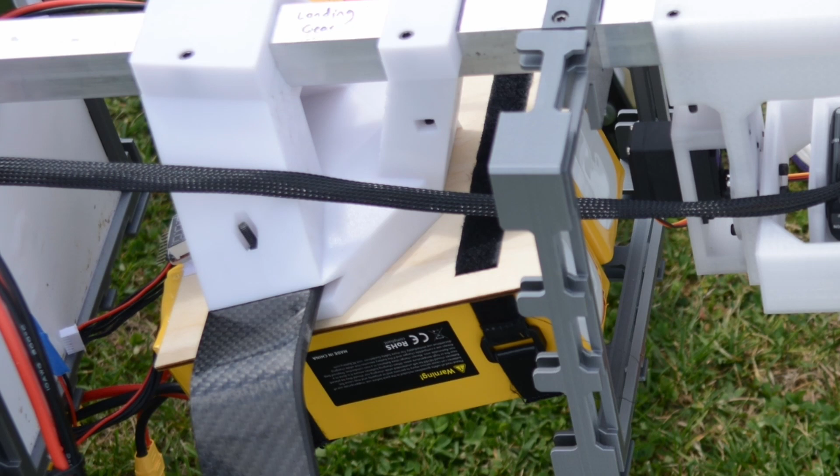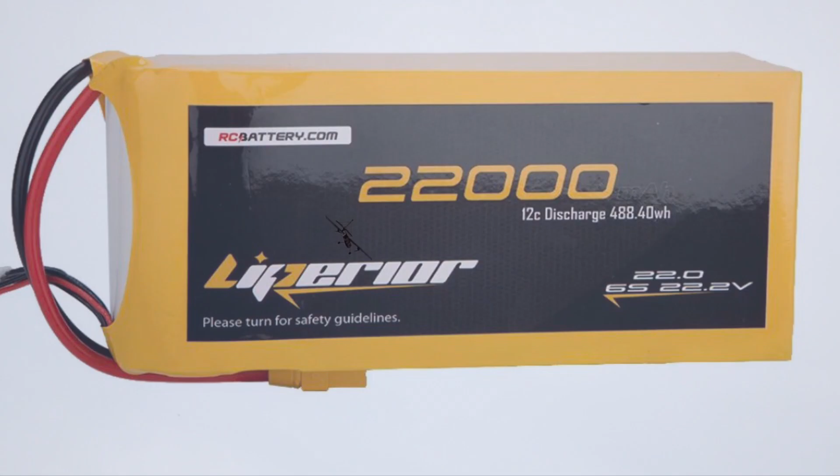Starting with the battery section, the original design contained two 16-amp-hour 6S LiPo batteries to power the motors. However, the new design uses two 22-amp-hour 6S LiPo batteries in series. This change increased the aircraft's effective range by 50%, allowing us to achieve the required range of 12 miles. The camera compartment contains a gimbal and camera connected to the electronics bay for target identification. This will be explained in greater depth in the imaging and ODLC section.

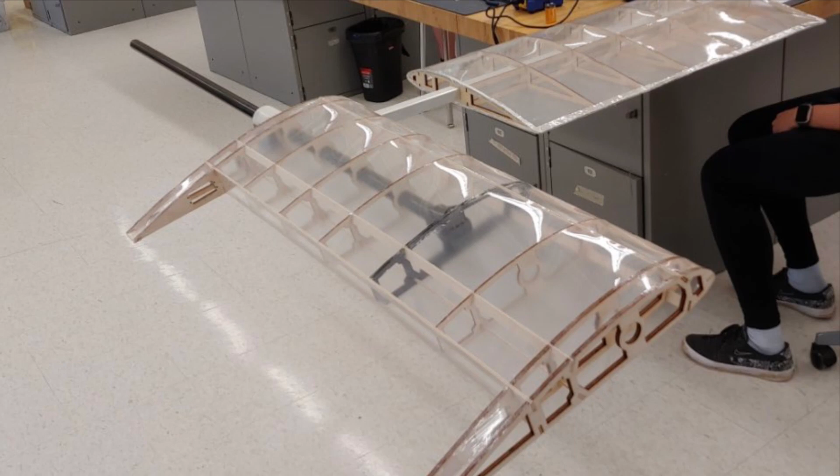The third section is the payload section, which rests under the new wing structure. A major decision and design choice comes with the implementation of carbon fiber wing spars and the new NACA 4412 airfoils. Carbon fiber wing spars were picked over aluminum as a single carbon fiber spar is lighter than two aluminum spars, increasing effective range. The NACA 4412 airfoil was chosen over the alternative symmetrical airfoil after recognizing more efficient aerodynamic properties during wind tunnel testing.

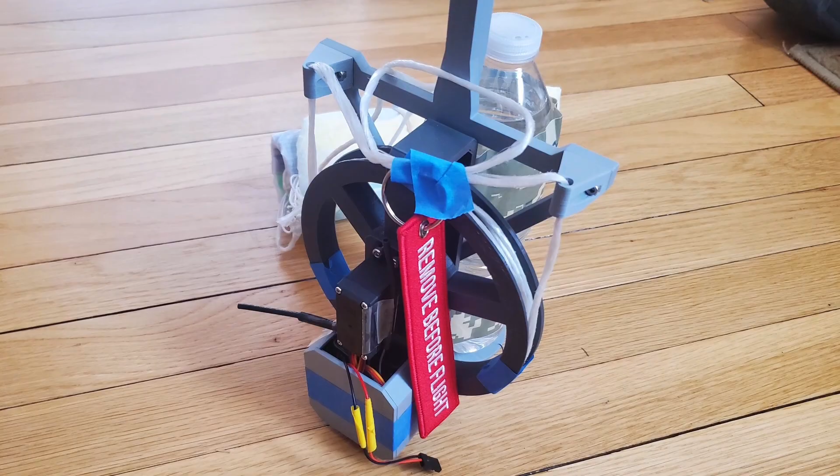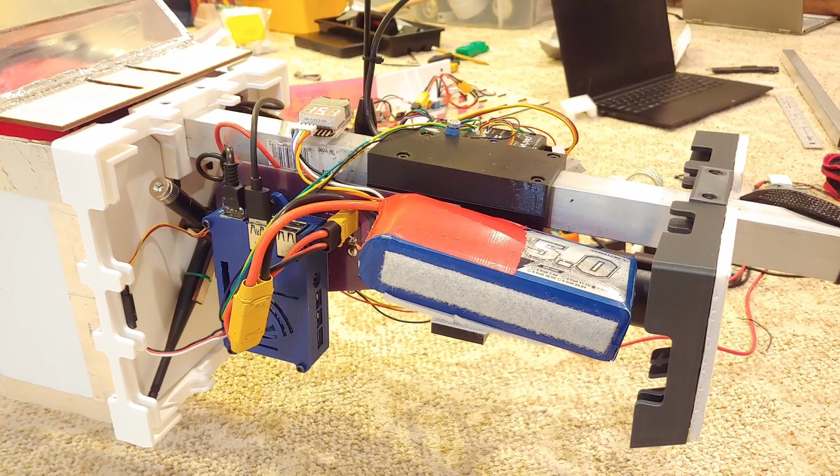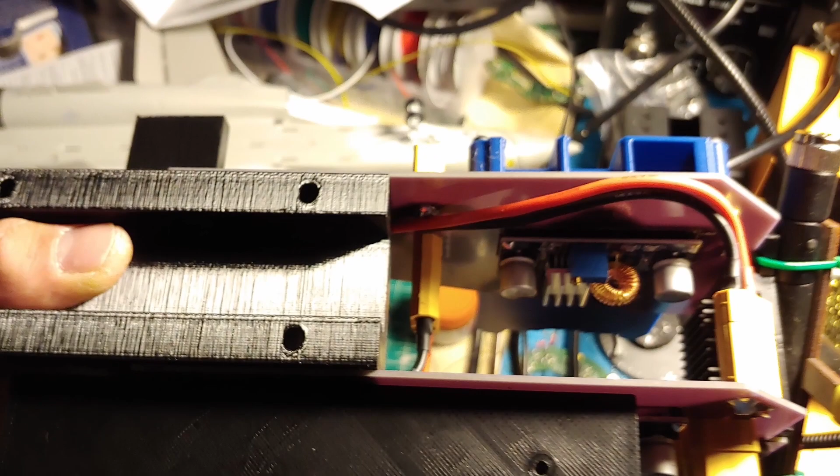As for the payload itself, the single UGV drop mechanism from last year was replaced with 6 small payload drop mechanisms, with one position unused as required this year. The last section is the electronics bay, housing all the systems for general flight and mission tasks. Some examples of the electronics in this section are the Pixhawk flight controller, Raspberry Pi 4 imaging computer, RFD 900X telemetry radio, and the Ubiquiti Bullet AC Wi-Fi antenna. The e-bay houses a 4S 5-amp-hour battery used to power all electronics other than the motors and ESCs.

Last year's electronics bay was more hastily put together with an emphasis on expandability, but this year's electronics bay solidifies the components by implementing a PCB design, replacing most Velcro mounting with screw mounts and replacing the individual servo extensions with 3 major cable harnesses with one connector each, running into the front, wing, and tail respectively. It also saves weight and improves ground clearance by removing the large tail cone print and replacing it with a tapered-off foam panel.

Avalon Mark X uses a Sony a5100 24-megapixel mirrorless camera with a 50mm f1.8 prime lens. This results in a field of view of 26.3 degrees horizontally, giving a target about 8 inches across around 70 pixels of resolution at our intended flight altitude of 120 feet. Flight testing has demonstrated that this is sufficient to classify targets. The lens is a manual focus and manual aperture lens which will have its aperture stopped down to f8 to ensure sharpness in the image and maximize depth of focus, keeping targets in focus regardless of variation in altitude.

In order to prevent washing out the colors of the target, the camera will underexpose each image by 2 stops. Testing has shown that in aperture priority mode, with this underexposure, shutter speeds have remained above 1/500th of a second and averaged around 1/2000th of a second in daylight and cloudy conditions, eliminating the possibility of motion blur in each image. The camera is mounted on a self-stabilizing gimbal which keeps it oriented straight downwards, so that the center of the image is the ground location of the aircraft, making target localization easier.

The camera will take about 2 images per second while the aircraft flies over the target area, and the onboard imaging computer will download these images for processing. The computer will identify which images contain targets using a YOLO algorithm and transmit the images with targets along with GPS coordinates of the aircraft at the time of taking each image to the ground station. The ground station will classify the target using a convolutional neural network and identify its location within the image using an additional YOLO algorithm, both of which are currently in development.

The location of a target is then calculated using the location of the aircraft and the position of the target within the image taken, and the target identification and GPS coordinates are then transmitted back to the aircraft to determine which payload to drop and where to drop it. The payload and payload drop mechanism are still currently in development. The leading option is our custom autonomously guided payload, which navigates itself to the ground target after deployment.

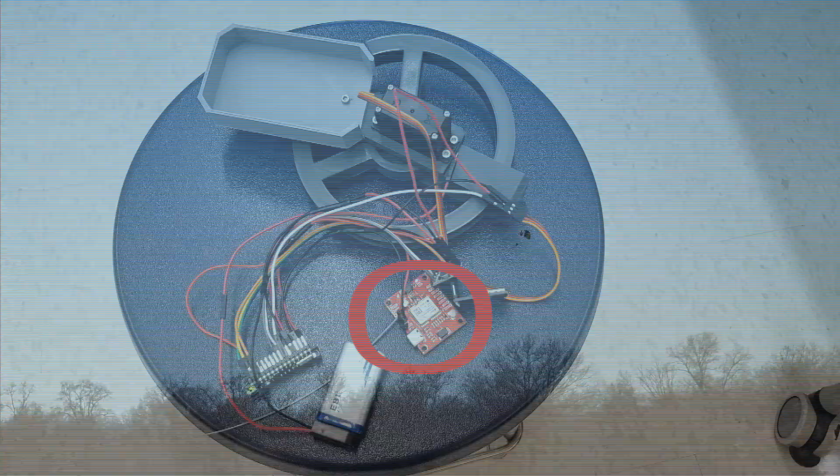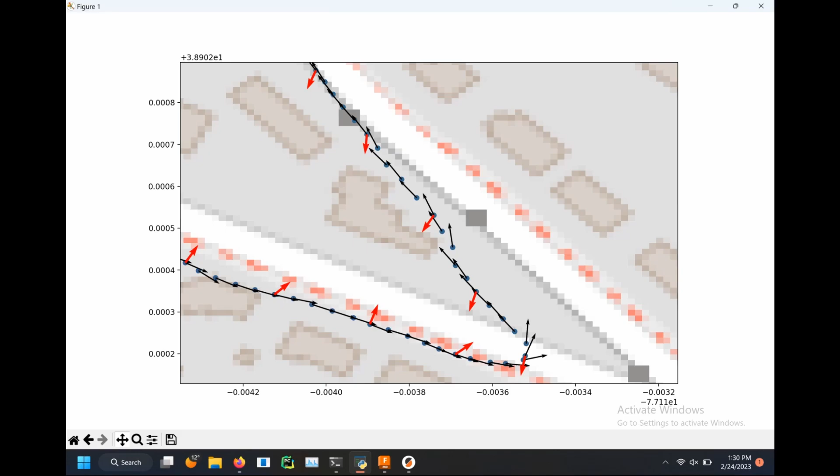The system uses a GPS module to determine its location, a servo to tension either end of the parafoil, and an Arduino to control all of the components. It runs a PID algorithm extrapolating the GPS heading from successive measurement points and keeping this aligned directly at the ground target by steering the parafoil. The ground target location will be passed to the Arduino by the plane's main flight computer over I2C before drop, though the serial connection is still in development.

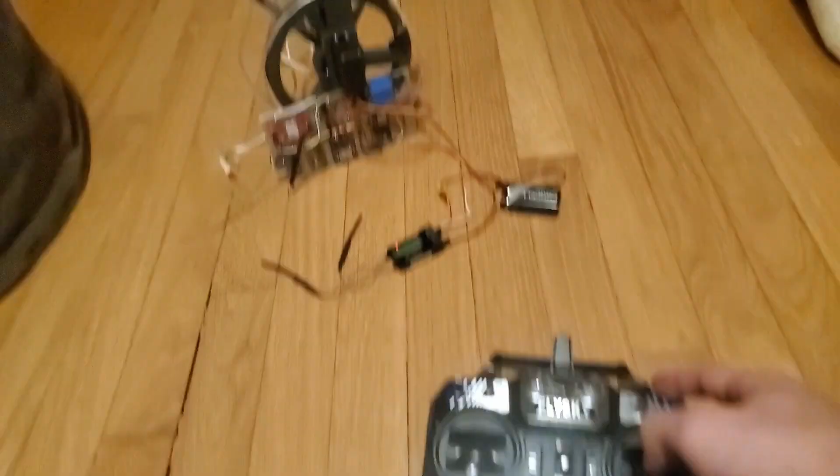So far, we've spent all of our time trying to get the mechanism working in manual flight, controlled by an RC transmitter, and have not yet attempted a target tracking drop, making for about 10 total test drops with 0 successes. We faced complications including the lines tangling and the parafoil stalling because the payload was too heavy. After reducing the weight for testing, we were able to get a well-controlled payload flight and hope to test it autonomously soon.

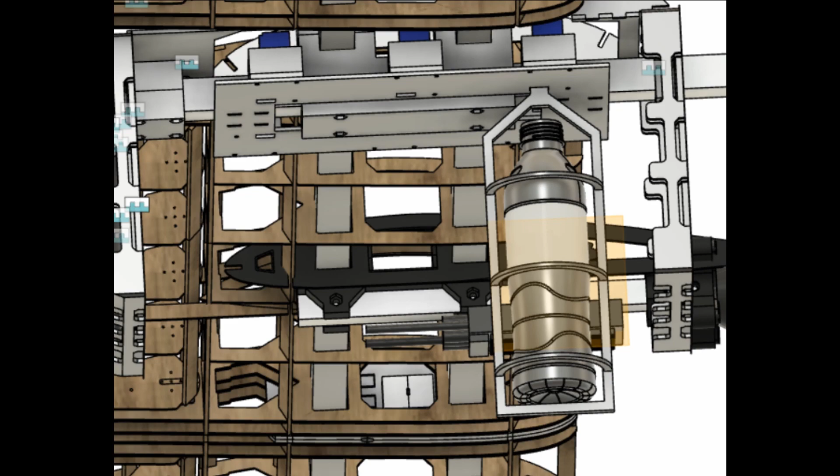Because of complications with the autonomous payload and its overall higher complexity, we are also developing an unguided version, which would merely take into account simple wind velocity along with an empirically determined drag coefficient to estimate wind drift. Our current drop mechanism is a single MG995 servo which is connected to a thin metal rod that's then pulled out of a hole in the payload, releasing it into freefall. For the final design, we are implementing a version with more of these side by side to carry more payloads. The drop mechanism is the same for both the guided and unguided drop.

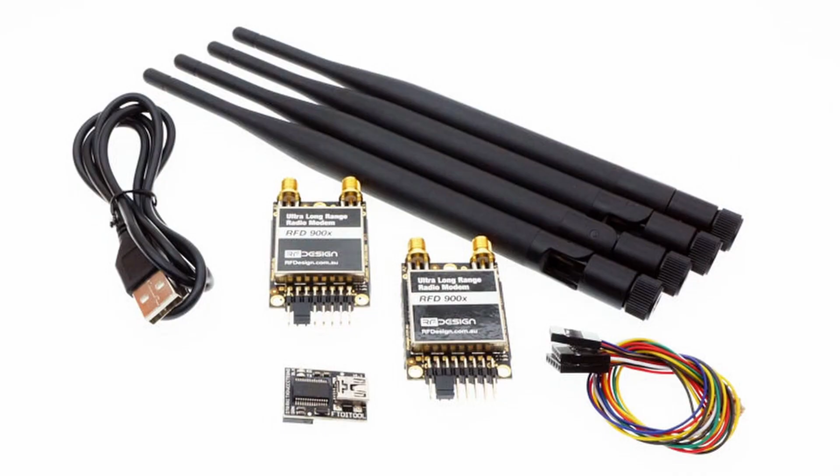Communications. Avalon Mark X uses an RFD 900X on the 915 MHz frequency to send telemetry data such as location, attitude, and battery state back to our custom-made ground station from the Pixhawk. Additionally, the RFD is used to upload mission waypoints to the Pixhawk. For manual flight, there are 2 redundant RC receivers on the aircraft to remove signal dead zones around the aircraft.

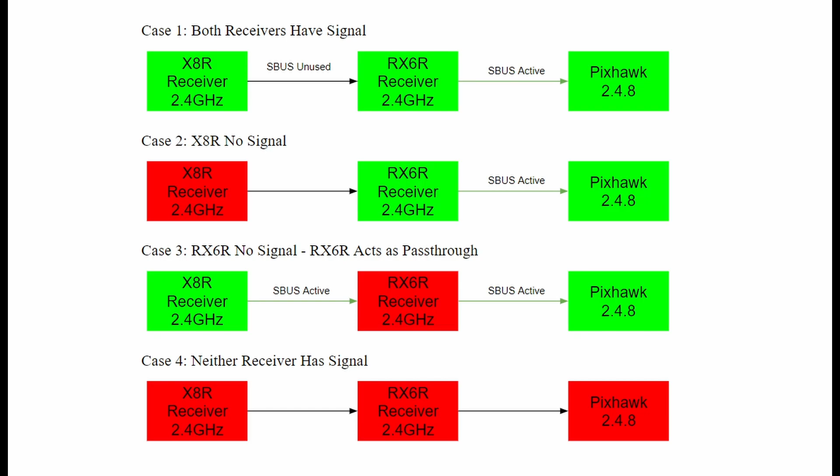These receivers are connected on the S-bus inline of the Pixhawk, sending transmitter outputs to the Pixhawk for manual flight and allowing the safety pilot to switch flight modes to auto, return to home, or manual takeover. The primary receiver is the RX6R mounted in the nose of the aircraft, and the secondary receiver is the X8R mounted in the tail. The transmitter sends signal to both of these receivers on a 2.4 GHz ACCST connection.

The aircraft also has a Ubiquiti Bullet AC mounted in the rear, operating on a 5 GHz frequency so as not to interfere with the 2.4 GHz RC receivers. The Bullet sends captured images and their associated GPS coordinates to a PowerBeam AC over Wi-Fi connected to the ground station, and the ground station can reconfigure the camera and capture settings in flight through the PowerBeam.

Through frequent flight testing throughout the year, the team has ensured that radios perform well at various ranges and conditions. In 17 autonomous flights, the aircraft has never experienced a sustained dropped connection over a range of up to 750 meters on either the RFD 900X or the 2 RC receivers, which are the 3 safety-critical radios.

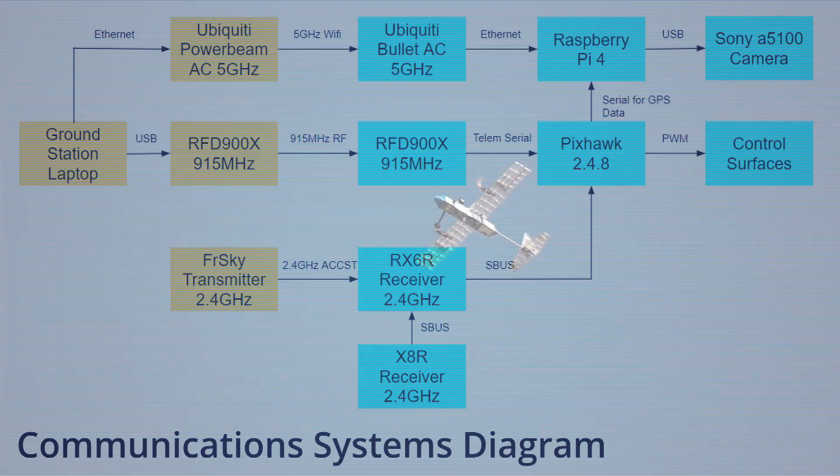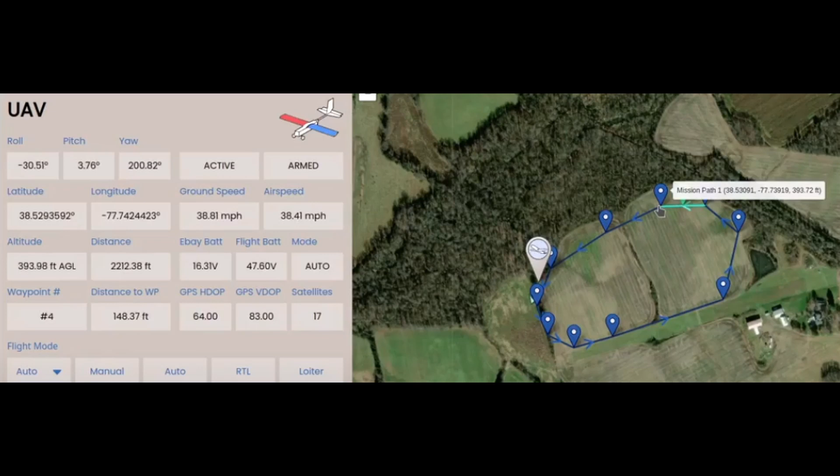Avalon Mark X features a single 10-foot aluminum spar that spans the length of the plane, as well as 2 8-foot spars that support the ribbed truss wing structure. The wing and tail sections were constructed from laser-cut plywood pieces and wrapped in Doculam, a MonoKote substitute, with a heat iron. The wing features 2 3D printed ribs that double as motor mounts, and the separate flaps and aileron sections are connected by a 3D printed clamp.

Other 3D printed components include the nose cone, tail receiver mount, rear landing gear mount, and bulkheads. The plane contains 4 separate component bays for the camera, batteries, payload, and electronics. Each bay is enclosed by foam paneling that slides into slots in the bulkheads. The plane uses a 2-wheel carbon fiber landing gear structure in the front and a VEX omnidirectional wheel in the back.

Avalon Mark X is stable in flight, and the thin and slightly undercambered wing shape promotes lift generation at higher cruising speeds. The T-Motor AT7224 190 kV brushless motors are powered by 2 6S 16,000 mAh LiPo batteries that connect to 12S 150 amp ESCs. The motors are secured underneath each side of the wing and use 18 by 10 inch props.

The table describes the developmental and flight testing conducted on the plane, including endurance and autonomous flying, as well as tests for takeoff, wing loading, control surface pressure, static thrust, and fuselage stress. Avalon Mark X met the flight performance requirements as specified by the competition rules, and also excelled in meeting the team's stress and load testing criteria. The plane has had 25 flights for a total of 3 hours, 23 minutes.

Avalon Mark X uses an onboard Pixhawk 2.4.8 flight controller running ArduPilot for autonomous flight. The autopilot can fly the aircraft between waypoints that are programmed in the custom-designed TJUAV ground control station. The combination of the Pixhawk flight controller and the TJUAV ground station allows for significant flexibility when flying in autonomous mode.

To tune the Pixhawk for autonomous flight, the Pixhawk's PID parameters were tuned using the auto-tune mechanism, which banked and pitched the aircraft roughly 20 times each. This gave the Pixhawk the information on how each control surface movement would change the attitude of the aircraft.

The ground control station was coded by the TJUAV programming team and is modeled off of Mission Planner. The ground station allows the ground station operator to quickly change various flight parameters, view image data, display previous flight logs, and track flight statistics.

The autopilot and ground control station combination achieves various mission tasks and requirements. The ground station operator can arm and disarm the Pixhawk, can activate the return to home feature, and can add waypoints to the route to fly over targets for airdrop. The operator can also view statistics on aircraft altitude, attitude, speed, and battery level.

The autopilot conducted 17 autonomous flights this year. A few minutes of each flight was conducted in manual mode, since Avalon Mark X manually takes off and lands, and the Pixhawk's telemetry data was tested on each flight before switching to autonomous mode. Flights ranged from 5 to 16 minutes, and the average amount of time spent in manual mode per flight was 2 minutes. When the autopilot was utilized, Avalon Mark X attempted an average of 10 waypoints.

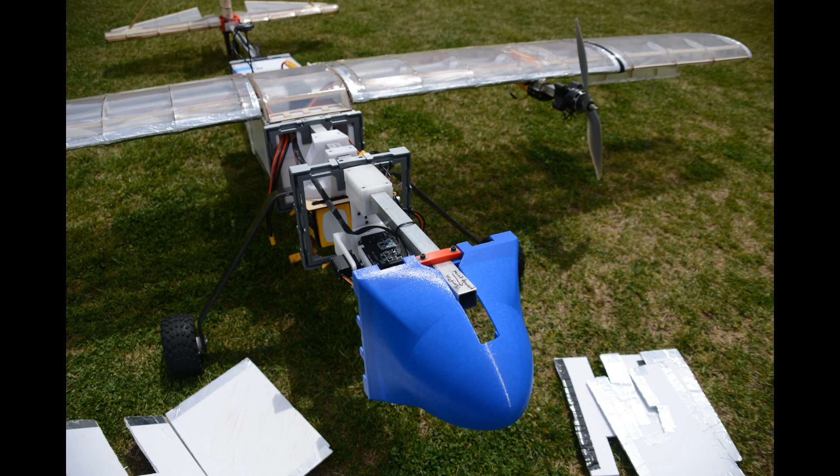In terms of the airdrop mechanism, we are using an autonomously guided payload. It does so by adjusting a parafoil to steer itself. Regarding communication, the Avalon Mark X includes both an RFD and a Pixhawk on board, which sends telemetry data to the ground station. The ground station in turn returns flight instructions. The actual aircraft is constructed using 1 square aluminum tube, which spans the whole fuselage. Additionally, 2 square aluminum tubes span the wing, which is made out of a plywood structure wrapped in doculam. Printed bulkheads separate the plane into different sections, reinforced by foam panels.

Our autopilot relies on both the Pixhawk and the ground station, running ArduPilot. It navigates the plane through GPS coordinate waypoints. Regarding safety, we have analyzed both the risks related to the team and the risks that may occur in flight. Sufficient steps were taken to mitigate each of the hazards detailed in Section 10. The Avalon Mark X was tested in both manual and autonomous flight modes throughout the whole design process.